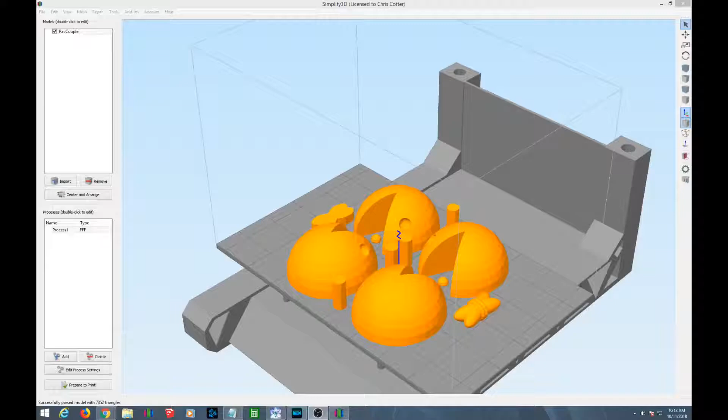Hey guys, I've got a fun little project I wanted to do today, and I've also been wanting to do a 3D printing video for a while. I haven't done one in a bit, and what I wanted to do is create a little organizer for my SD cards. What I found is that while I've been doing these videos, my SD cards just get thrown everywhere, and I'm having a hard time remembering which card is full, which I'm using, which I've emptied. There's just piles of them everywhere. So I want to create an organizer that'll help alleviate that issue, and make a video about it. Let's go ahead and get started.

The organizer itself is going to be pretty simple. It's just going to be a slab of plastic with 3 bins that are labeled to hold the SD cards. So let's go ahead and get started.

Okay, so I'm in Tinkercad, and the first thing you should do is name your project. Tinkercad just gives you some weird nonsense name, and if you ever want to go back to your object, it's good to have it labeled so it's easier to find. Let's just call this SD card organizer.

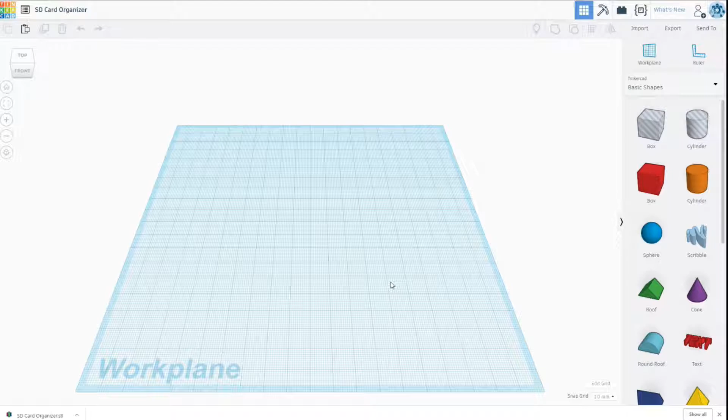Now, the first thing I want to tackle is the little hollow areas that will create the bins for the cards. To do that, I need to bring in a hollow box and give it the size I want. I've already measured this, and I want the bins to be about 60 millimeters by 60 millimeters, which should be big enough to hold several cards if they're haphazardly tossed in there. So let's bring in a ruler. Our box always starts out as 20 by 20 by 20, so let's go fix that.

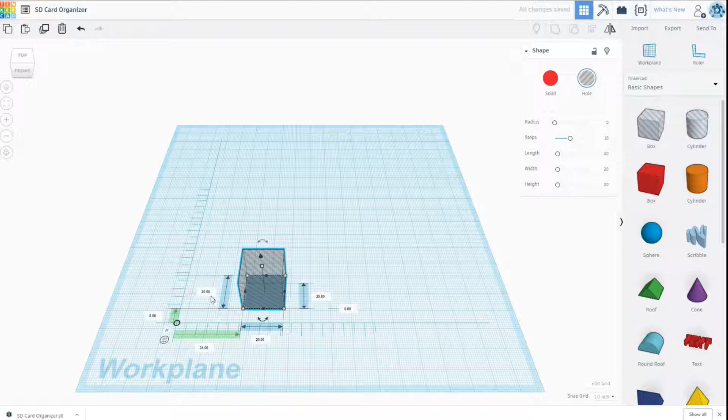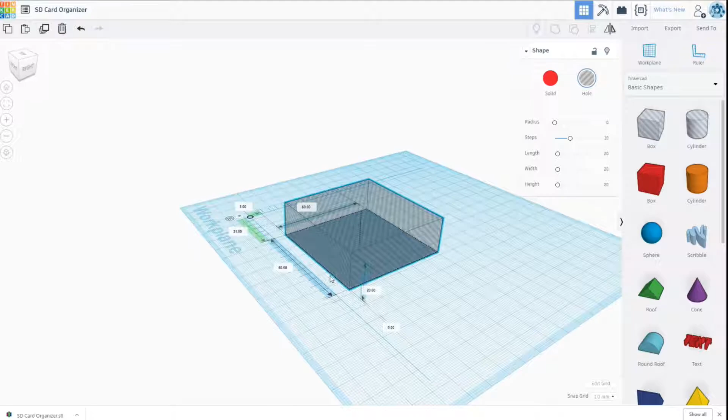Okay, so here is our hollow box. Now, this box is awfully sharp, with edges at 90 degrees. I'd like to have a fillet on these edges, but here we run into one of the weaknesses of Tinkercad - it just doesn't do fillets very well. You can round over a full object like this, but say I wanted to create a fillet just on this one edge - I can't do that. I can only round the entire object over. So whenever you want to do fillets, you really need to know ahead of time where you want those to go and plan for it.

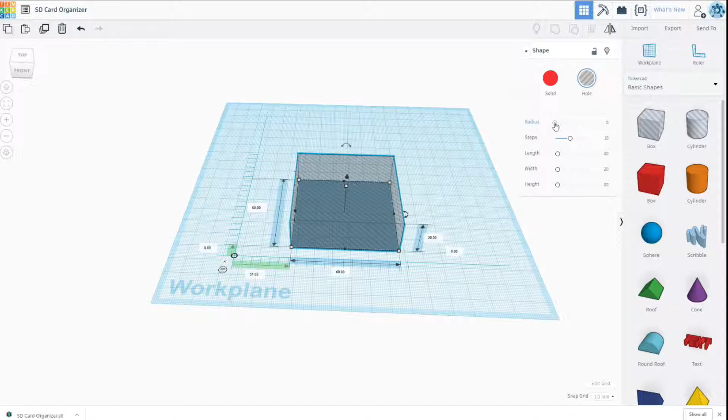So let's round over this object so that when I carve out the main piece, it has those rounded edges. Let's make it a solid so I can visualize it better. That looks pretty good to me. Okay, let's make it hollow again.

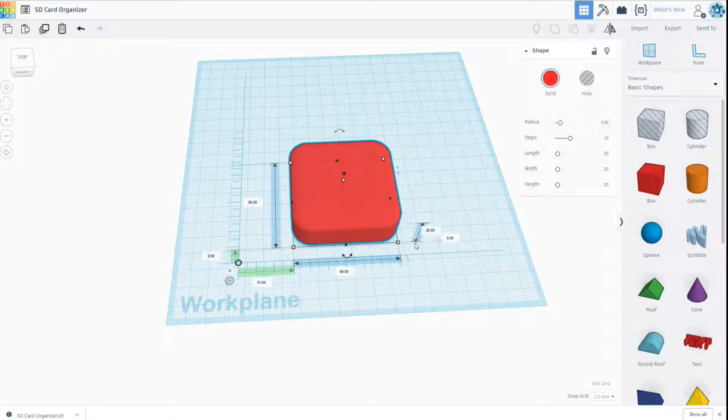So I'm going to need 3 of these little hollow objects to create the bins, and to do that I'm just going to copy and paste 2 more of these. You just click on your object to select it, then hit Control-D, and that will duplicate it. So there's one, and there's the other.

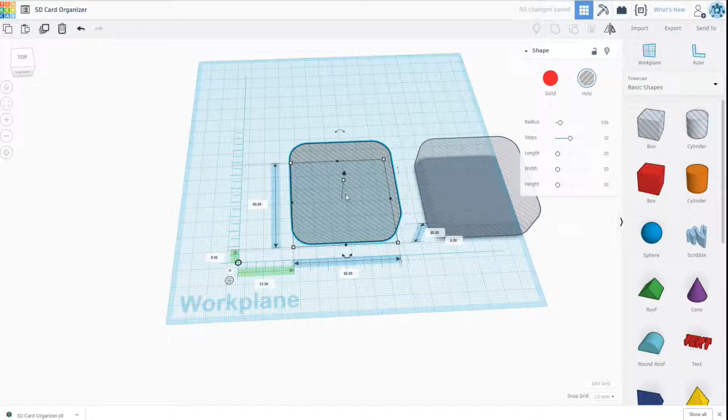Okay, so I've got my objects now. The next step is to orient these so they're the correct distance apart - I want them to be 5 millimeters from each other. To do this, I need to move my 0 point from the ruler. I want all the objects to be on a positive number, and I take my center piece, measuring from the center, not from this edge. This little icon here, if you click on it, will change to the point of the object you're measuring to, so now I'm measuring to the midpoint.

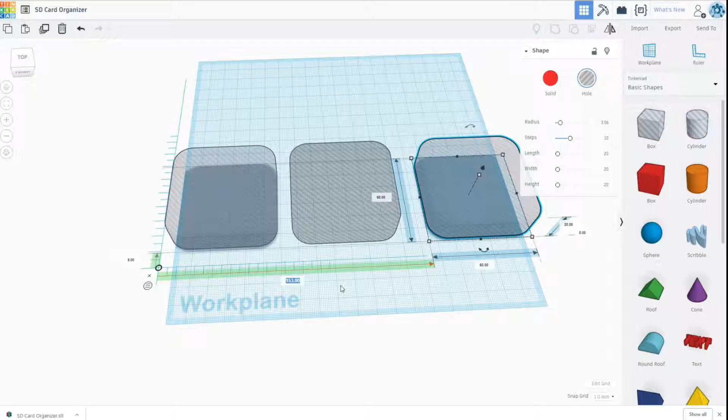And there we go. So in a similar way, I need to do this guy right here. But I think the easiest way to measure that is to go ahead and group these two.

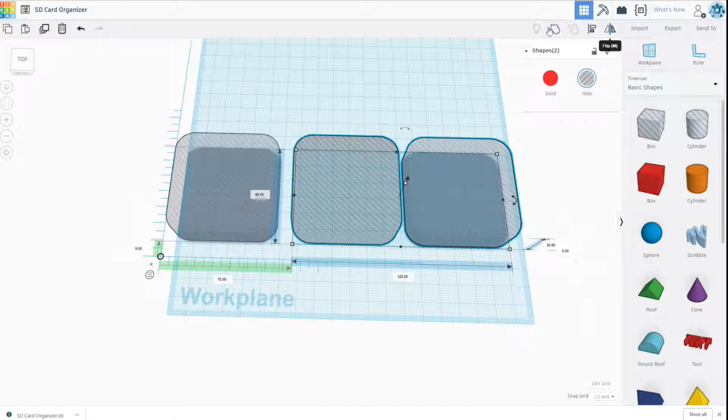Group here. Now I need to measure to the center point of this piece. So I click on use midpoint, and it is at 36. Let's make it a little bit easier number to work with. We'll make it 40. So if the midpoint of this 60 millimeter object is 40, 30 to this edge, and then I need 5 more. So 35 plus 40 is 75. So this edge of this full object needs to be at 75.

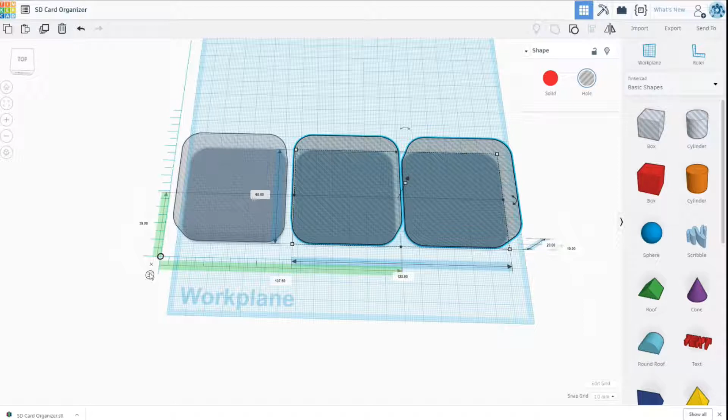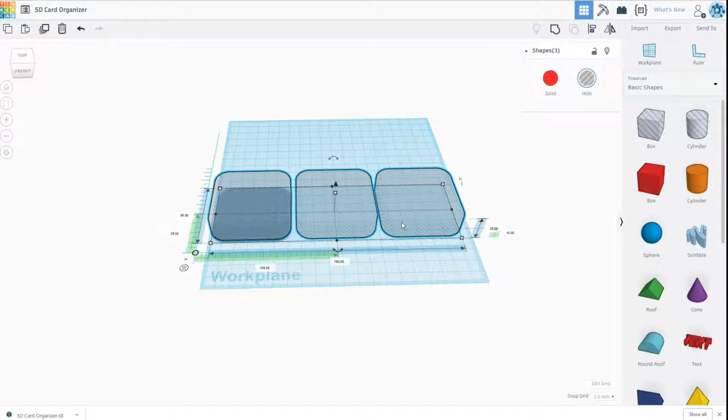So I click to use endpoint. We're already there. Okay, so now I have my hollow areas created. It's time to work on the base, the main body of the organizer. I don't know why that black box comes up, but it drives me crazy when it does. But let's get those out of the way. So I just selected them and dragged them out of my work area.

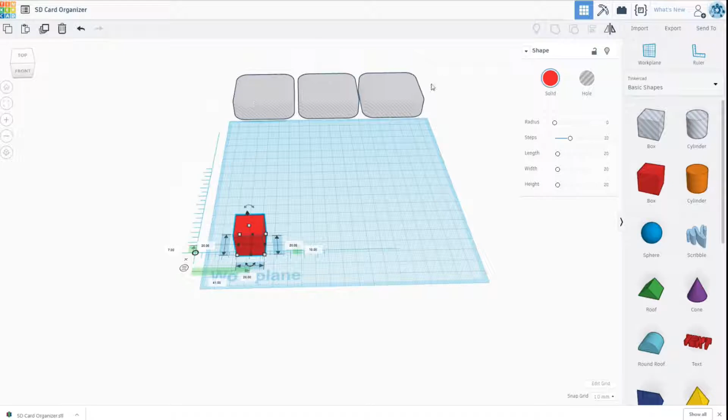So let's pull in a box here. And I need this to be 5 millimeters wider. Well, actually 10 millimeters wider, and I need 5 millimeters of space on each side. So if this whole object, let's make it one object, it is 150, is that right? 190. So if that's 190, and I need 5 millimeters on each side, it needs to be 200.

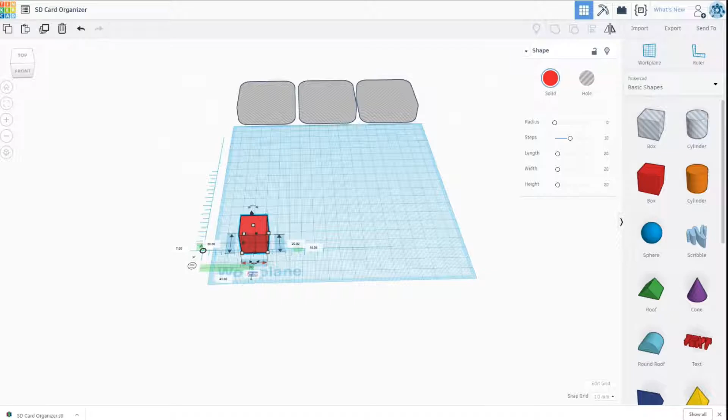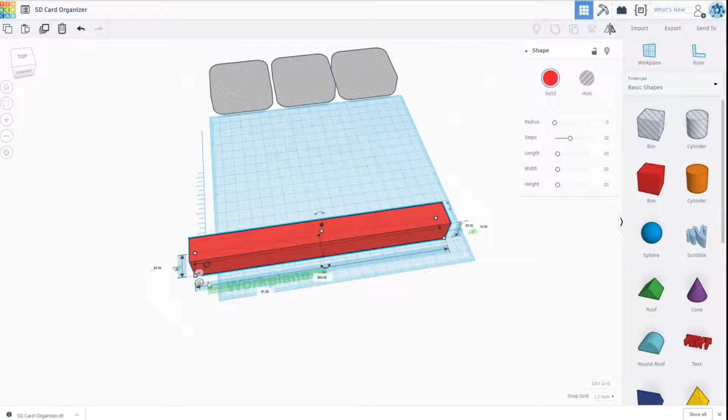So let's do that. And now I need to make the depth, and I want to leave enough room, so I don't want there to be just 5 millimeters on the top and bottom, on this leading edge and this leading edge. I want there to be 5 millimeters of room here, but on this edge I want enough room for the text because I'm going to label each bin. Let's go ahead and put this at 0.

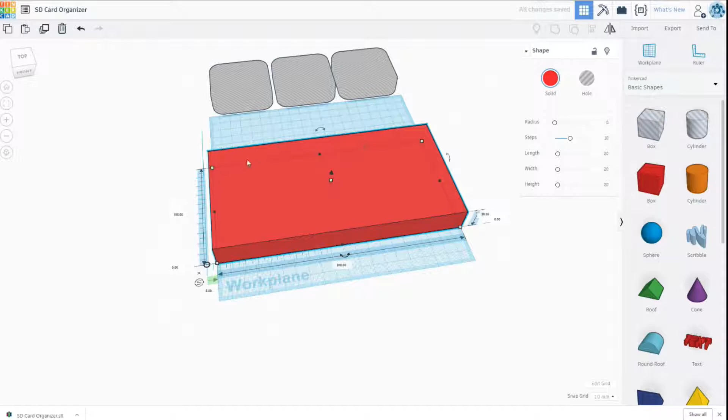Now another thing I want to do is add fillets to this object as well. But this is going to raise an issue with Tinkercad because it's going to round over the entire object, and I want the bottom to not have fillets. It's going to help with printing, and it's going to help it sit on my desk better. So let me show you how I can give this object fillets while still having a flat bottom. It's sort of a workaround.

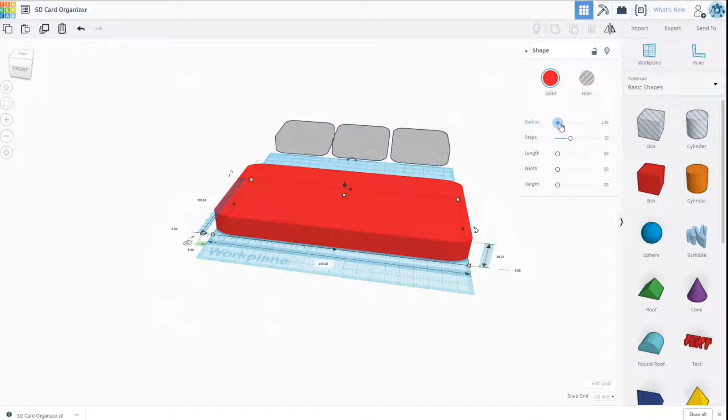So first we have the object selected, and I need to give it some radius. I think 2 will work. That looks pretty good. So now the object has radiused edges, but the bottom is also radiused, and I don't want that.

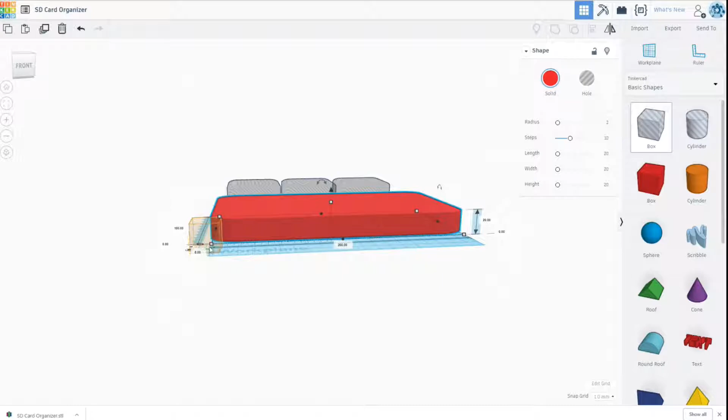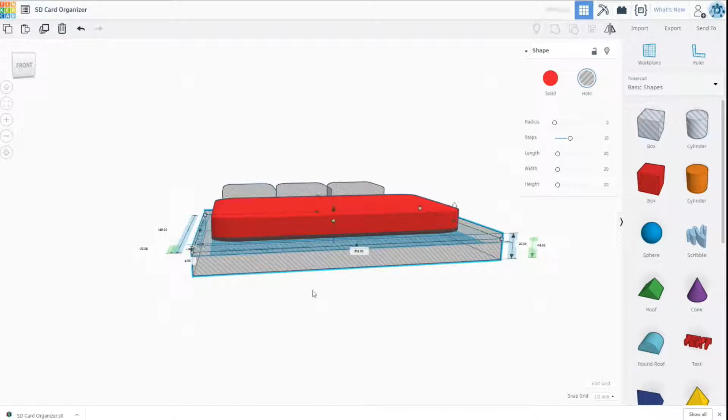So what I'm going to do is bring in another hole cube, and let's lower this. Make it bigger. Okay, so now I'm making sure that I'm cutting off that radiused bottom. So now I have that oriented correctly. I'm going to group them together and hit the group button. So now we have a nice flat base for this to sit on my desk.

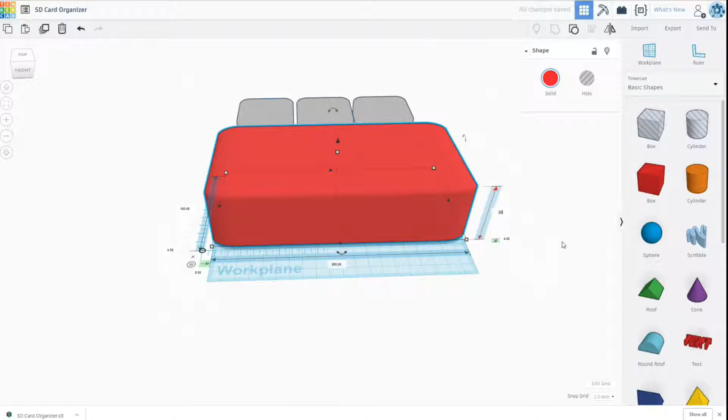Now I still want this to be 20, so let's go ahead and change the height. Oops. Okay. And let's put it on the plane. There we go.

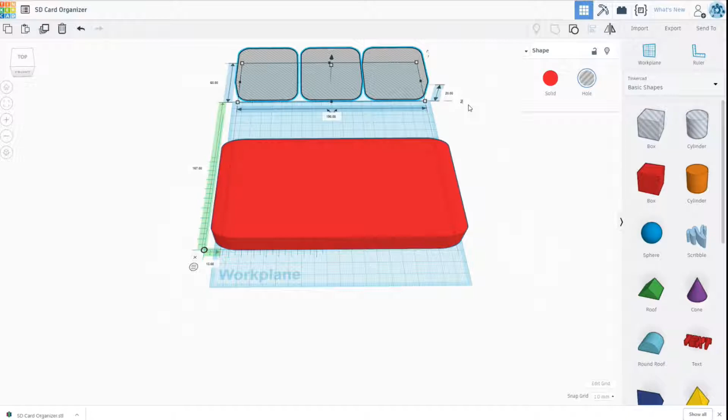Okay, so now that I have my organizer base piece created, let's go ahead and drag these over here. Let's give it 2 millimeters up, and I'm going to actually make this a little taller, so I make sure that it cuts all the way through that. You can just grab these little handles and change the dimensions - a really easy way in Tinkercad to manipulate your objects.

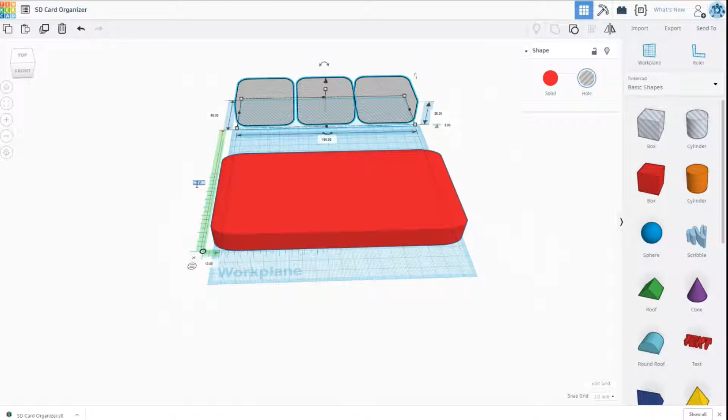So I have this main piece set at 0. I want this to be 5 millimeters from 0. We're now at 167 - we were already centered, I believe. Now let's just double check and make sure we are aligned. Yeah, we're aligned in this direction here. Let's get out of that.

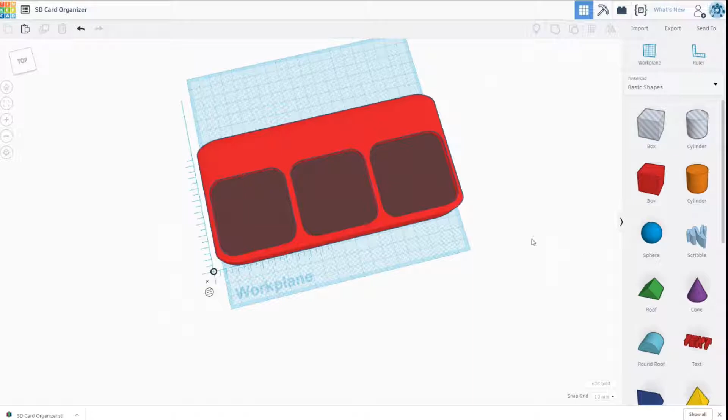That looks pretty good to me. It might be a little tall. Let me do this and see what it looks like. That's probably a little better.

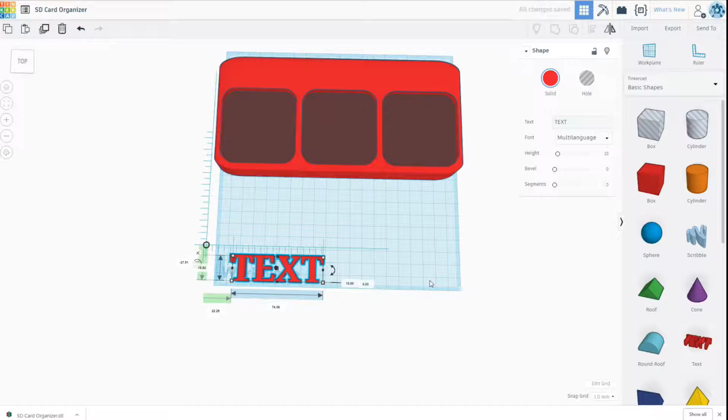Okay, so now let's go ahead and bring in some text. One of the finicky things with Tinkercad is you can't choose your font size directly. You can choose your height from top to bottom, but the only way to do that is with these little handles here, which is fine unless you want to make multiple text objects that are consistent in height, consistent in size.

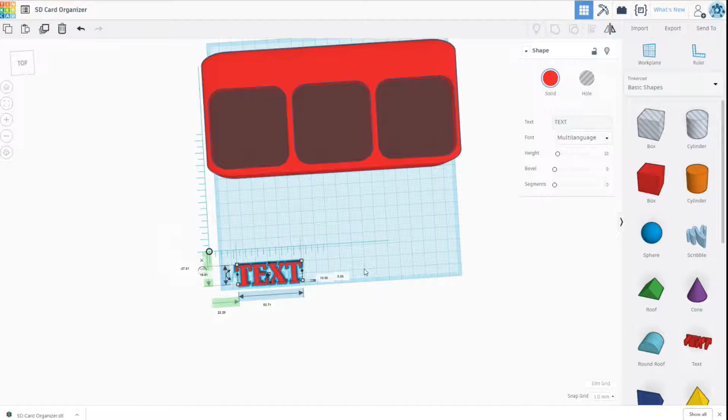But the problem with that is that it makes it difficult to make multiple text objects that have a consistent size. Like if I bring in another one, I have to just kind of eyeball it to get it right. But there's a way we can work around that. First, I want to get my text size kind of fit to this object. So the first thing I need to do is get the text in place.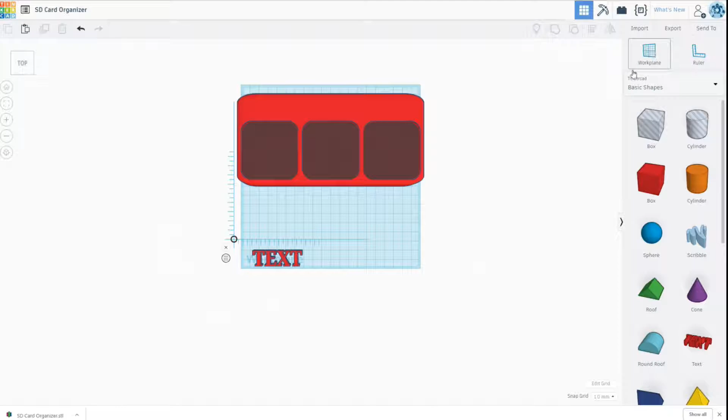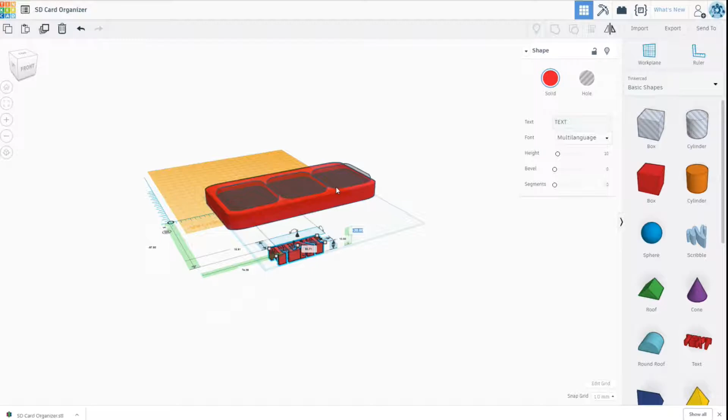Let's bring in a work plane and set it on top of our primary piece here. So now we're working on a plane that is right on top of this object. What I need to do is select my text, and you can see it's -20. I want this to be 0, so it's right on top of that. Okay, now I can move this text to here, and it sits right on top of my object, more or less. It's not perfect just yet, but we'll get to that.

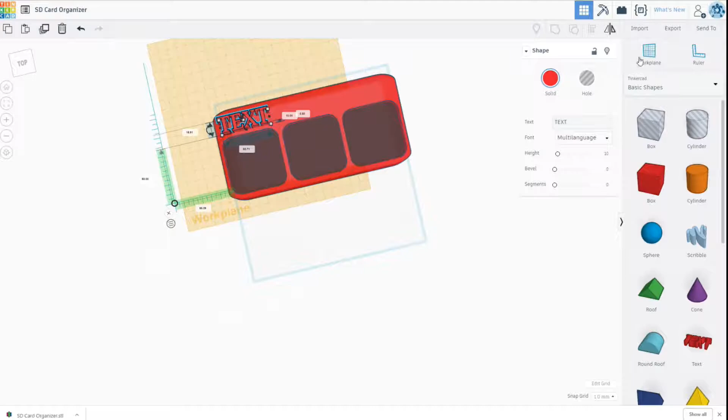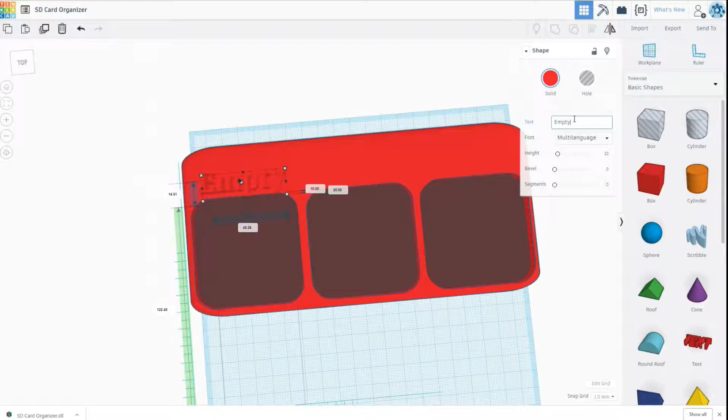All I'm doing right now is just eyeballing my text size so it looks good. So we pull out another work plane and just throw it anywhere, and that will get you back to your initial work plane. Okay, so let's go ahead and shift left click will pan. So now I need to size this. And let's get a proper. I think this one's going to be empty. I also want to go ahead and change the color so I can see this better. Orange is fine. Okay. That looks pretty good to me, at least the size.

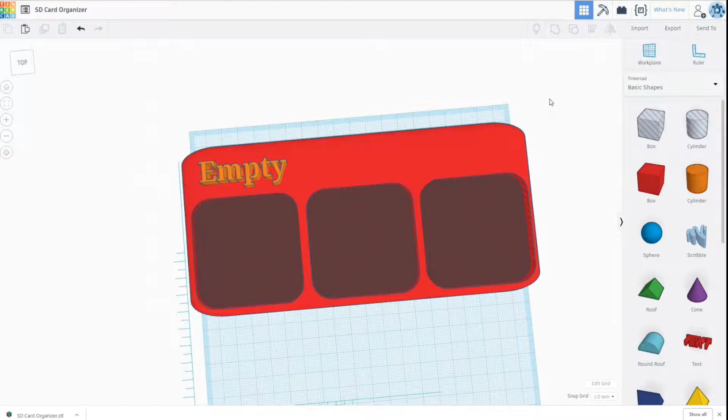So now what I need to do is I need to create 2 more text objects that have exactly the same font size. Now how you do that is first let's deselect, because we were in the text typing mode. So now let's select our text, and we just hit Control-D. We'll copy that piece, and now we have another text object that is exactly the same size. And we need to do that one more time. Control-D, and there we go. Now we have 3 text objects that are exactly the same size.

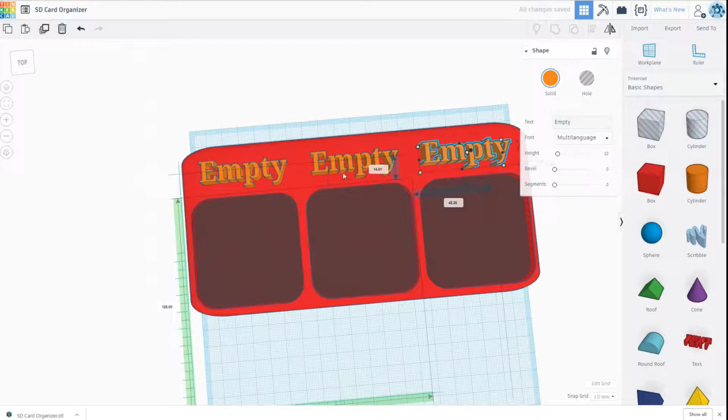But I need to change the labels of the bins. That's going to be Full. And this one is going to be entitled In Use. Okay, now that I have the text sized and in roughly the correct location, I need to orient the text with the bins. I'm going to go ahead and move the primary piece out of the way, and I'm going to orient these individually with the hollow pieces. Okay, so the next step is to orient the text with the bins, and the way I want to do that is I want to orient them individually.

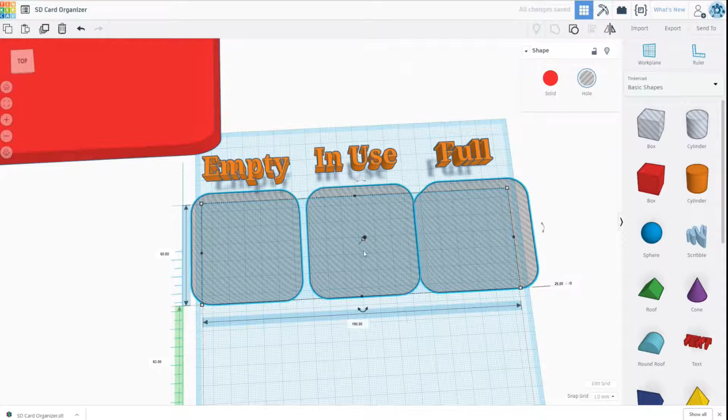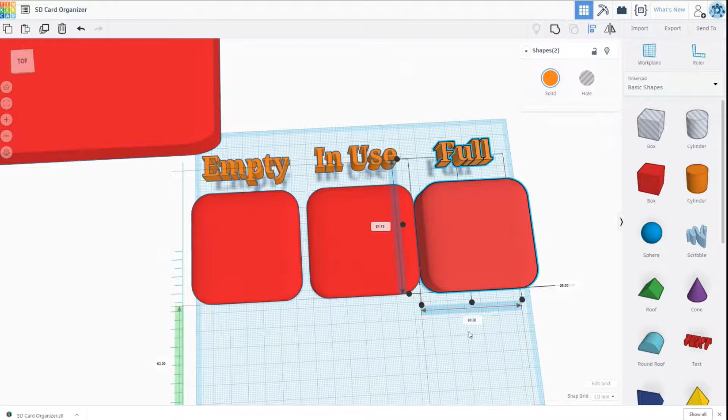And the first step to doing that is I have these hollow areas, which are not hollow anymore, but they can easily be made hollow. I need to ungroup those so they're no longer one solid piece. So now I have 3 individual pieces. So I just select both the text that goes above it and the hollow area. And I don't want them to be hollow, because if I group them when they're hollow, they'll just disappear. So it's good that they change back to a solid. Now I have them selected. I need to align, and I just want to align in this plane, right here. Okay, so now the Full and what will be the hollow piece are centered.

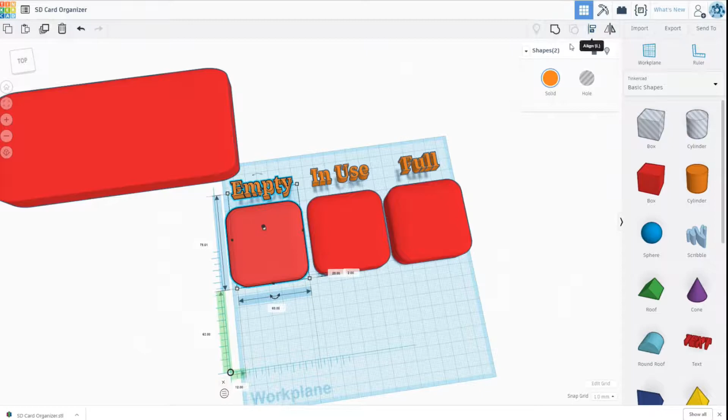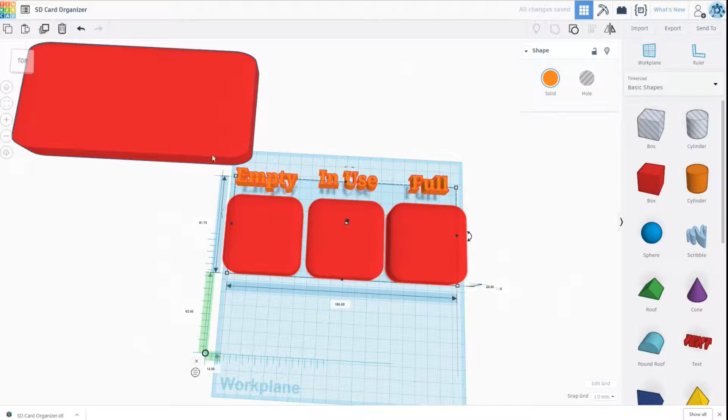Okay, so let's do that with this one. Align, center it, deselect, and one more time. There we go. So now all these pieces are nicely aligned. Let's go ahead and select these, and I'm going to go ahead and group these for the time being, so I can manipulate them easily. Let's move this in. I'm going to go ahead and put this back to 0.

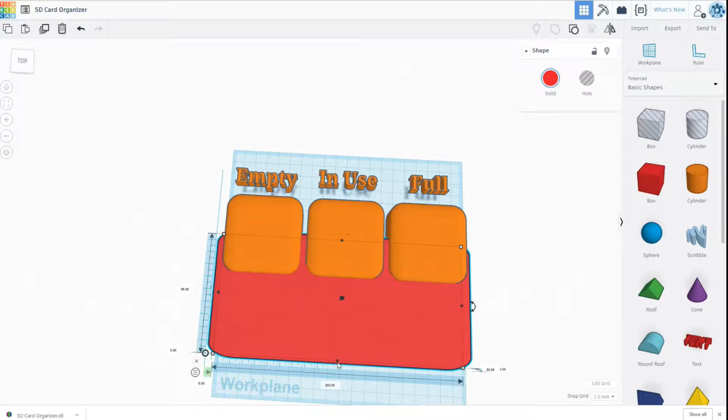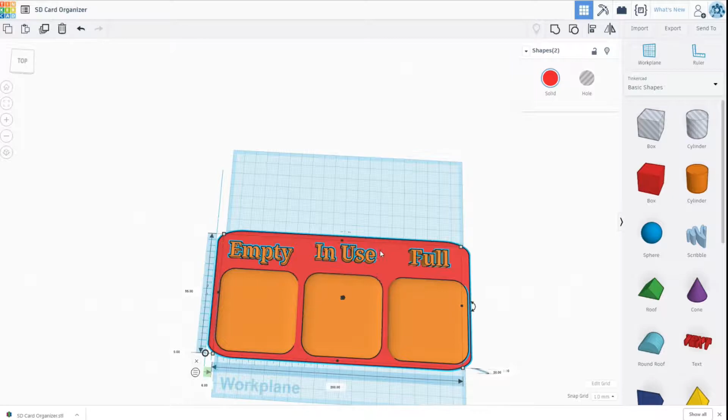Now I want this edge to be 5 millimeters north of this edge. So I've got the main object at 0. This edge is on 0, so I just want this to be at 5. There we go. So now our object is almost complete. We've got everything aligned properly. We have sort of our pseudo fillets done.

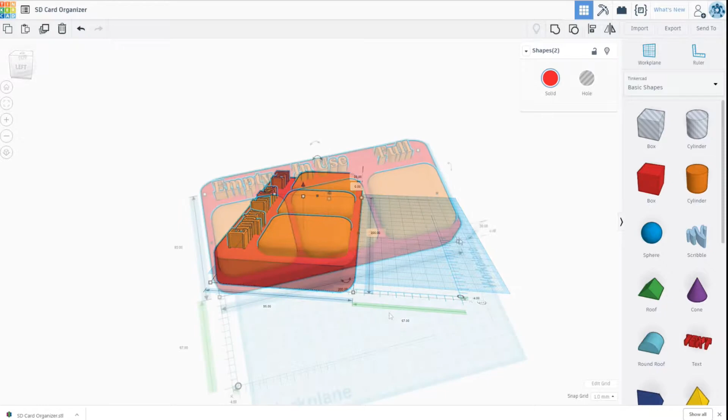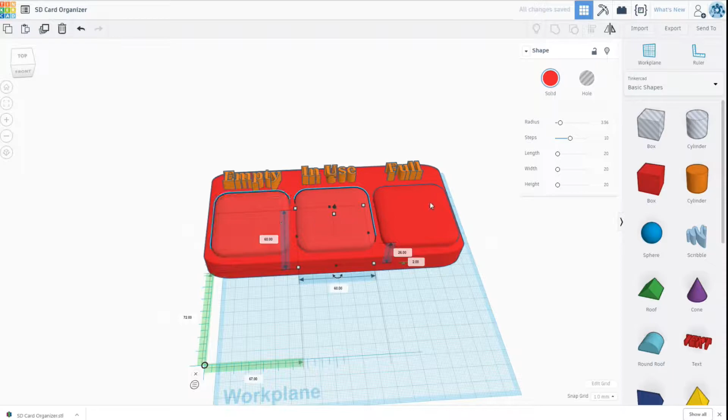We have our text centered and aligned, but there's still one issue that I'm seeing here, and that is that the text is really proud. It's too tall. There's 2 ways we could make this text less proud. Well, first we need to ungroup this, and we can go ahead and make these hollows again. There we go. So now we select our text, and I want to go ahead and select them all as one object.

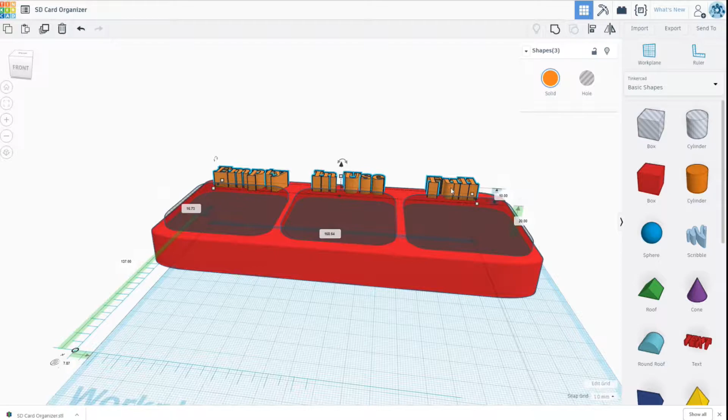So you could just make it shorter, right? They're 10 millimeters tall. You could make it like 2 millimeters. The problem with sizing the text in this fashion is that sometimes with Tinkercad, whenever you place one object on top of another object and it's directly on top, there's like a really small gap between the 2 objects, even though they're supposed to be connected. And when you print it, the objects just kind of fall apart from each other.

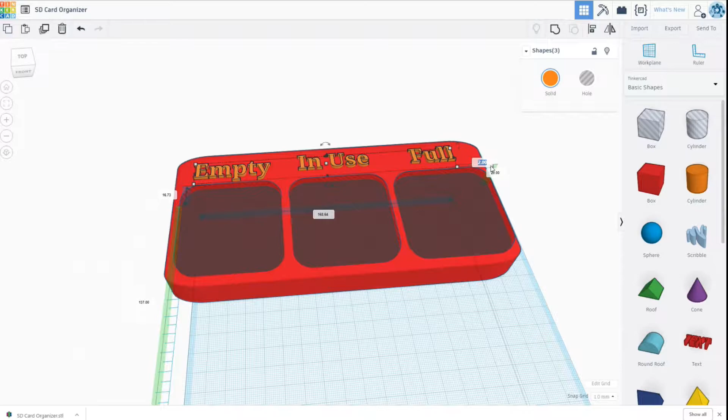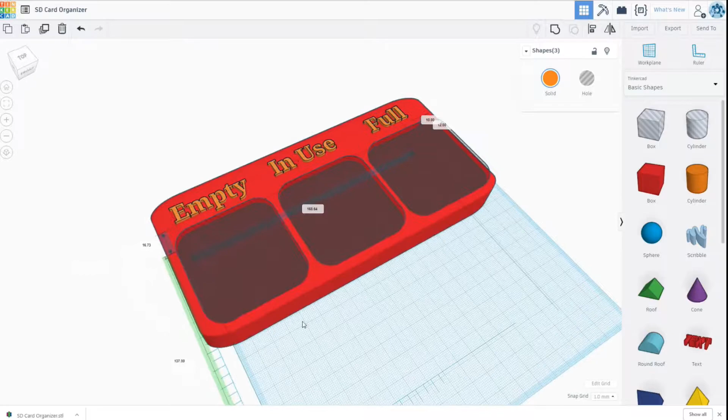So a better way to do this, let's go ahead and make that 10 again, is to just lower it into the one object. So we're 20. We need to lower that 8, so we'll just make it 12. There. And that text looks good to me. And now the last thing to do is select the entire object and to group it. There we go. We now have created our object. It looks pretty good to me.

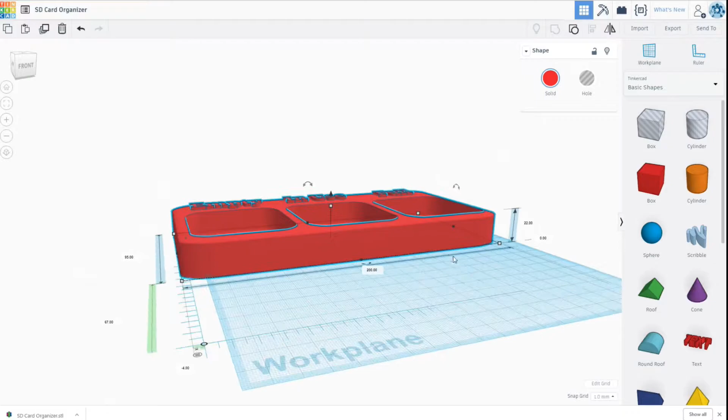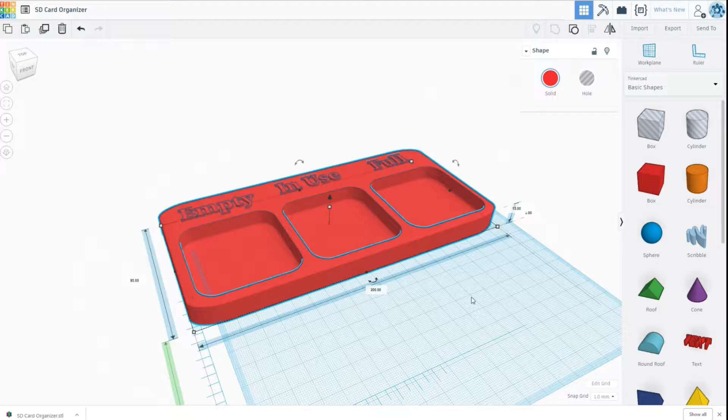We are 22 millimeters tall. It should be okay. It might be a little tall, but we'll print it out and we'll see. I could make it smaller. Maybe that's better. So I don't want the object to be so tall it's hard to dig the cards out of. It looks like 3 cards stacked on top of each other aren't even 5 millimeters, and this would give me 13 millimeters of height inside the bins. So I think that's going to work.

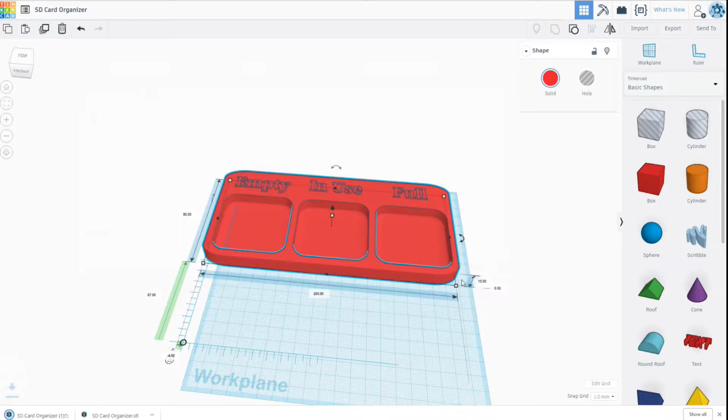The next step is to print this, and to do that I need to send it to the slicer and get it sliced. So let's go ahead and export this as an STL, and you can see I've already done this once, but save. And now our next step is to move this STL into our slicer to create the G-code for our printer.

Okay, I just want to cut in here and mention that I was going over my model before I started slicing it and printing it, and I noticed that my text wasn't on the same line. These 2 text objects were like 2 millimeters higher than this text object, and so I fixed that. I just selected both of them and pushed the down arrow twice.

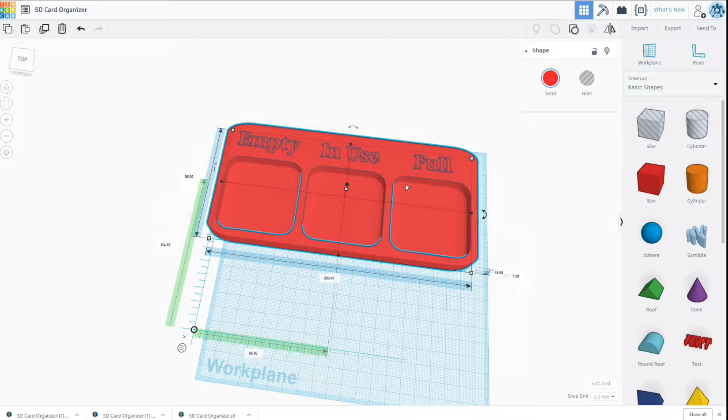You know, this is just one of those things that whenever you create an object, it's good to double check your work after you think you're finished. But it was an easy fix. I just needed to take these 2 text objects and lower them 2 millimeters closer to the 0 of my ruler. Okay, that's that. I'm going to send this to the slicer.

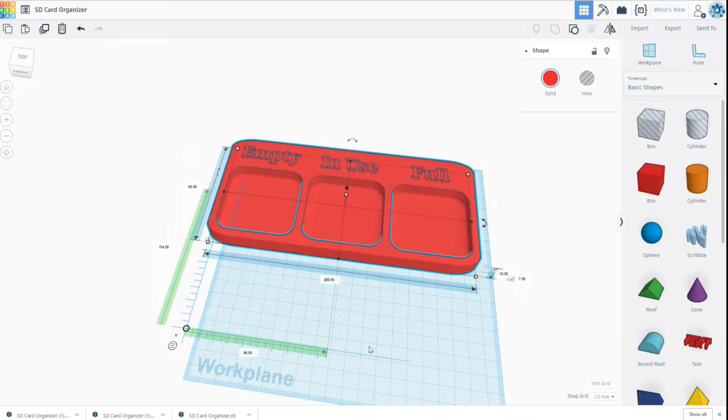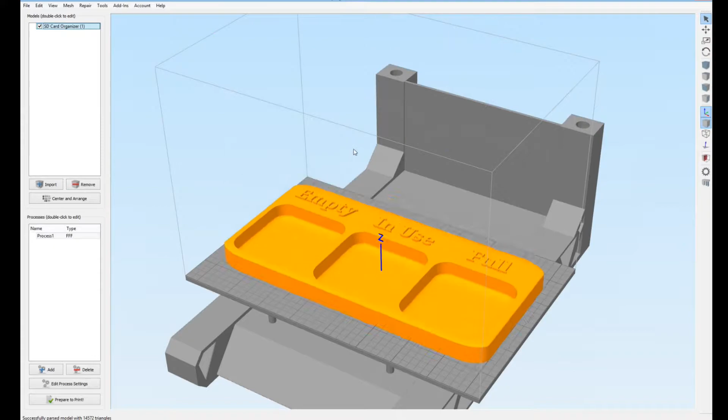Now in my slicer, which is Simplify3D, I'm going to go ahead and import my object, and it is in SD card organizer, and I want SD card organizer 1. You can see it barely fits on my tray. The printer I'm going to be using is my PowerSpec Pro that I got from Micro Center. As long as my objects fit on this printer, it's really been my go-to printer.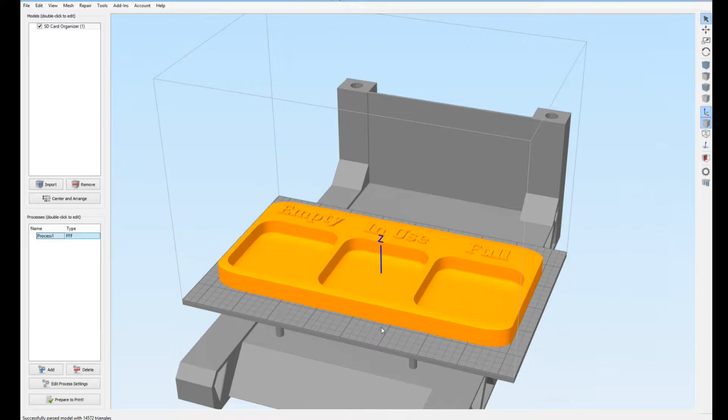I have a CR10, and I like that printer a lot, but it prints really slowly. At least the profile I have for it prints slowly, and I haven't had much luck with other profiles. So I've been sticking with my PowerSpec for objects that fit within it. But it's nice to have the CR10 for larger objects. So I have my profile set up. I'm using the PLA setting. I'm going to be printing with PLA. Let's go ahead and do it on medium, with layers 0.2.

I'm going to go ahead and add a brim, and in Simplify 3D you just use the skirt brim settings, but you set your offset to 0, and then that'll give you a brim. If you set your offset to like 1, you would have a skirt. Infill, that seems a little high. Let's just do 15. 15 sounds good. What about my layers? That's way too many top layers. The last thing I printed needed a lot of layers. Let's just do 3. 3 and 3 should be fine.

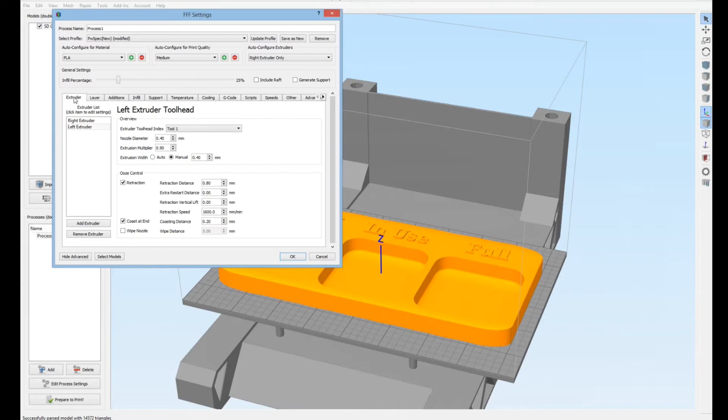Don't need any support material. This should be pretty standard. We're going to be on the right extruder, and what about the heat bed? 50, that's fine. Okay, this all looks pretty good. I'm going to go ahead and prepare to print. So Simplify 3D slices the model, and here we go. This just shows the layers, and I can take those down and see how it's going to print. That looks pretty good to me.

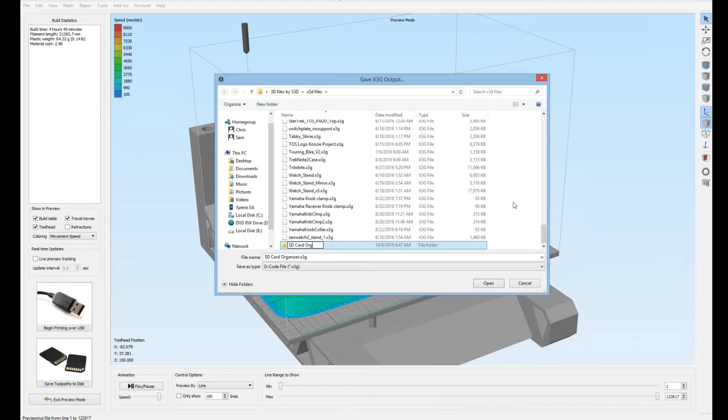And let's just save it to disk. SD card organizer 1. I don't need the 1. And let's go ahead and make a folder for this, and save it. This is going to take 4 hours to print. It's going to be a long print, primarily because I'm going with medium settings. But we're going to go ahead and transfer that to an SD card and get it started.